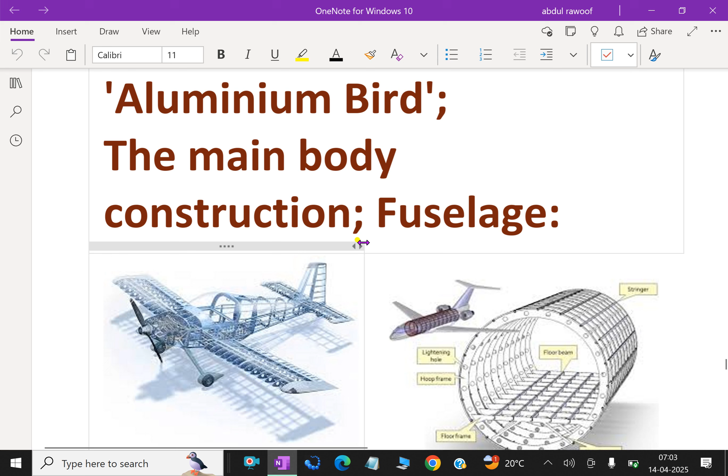Both aircraft and spacecraft must balance structural strength and lightness, typically utilizing monocoque or semi-monocoque structure. The core design principle for all flight vehicles is to minimize weight while maintaining adequate strength to support payload capacity, fuel efficiency, durability, and overall performance.

Engineers must carefully select lightweight materials and optimize structural framework to withstand the stress of flight, whether in Earth's atmosphere or space. Flight vehicles are constructed from multiple components, component assembly and sub-assemblies, each serving a specific function but requiring seamless integration to form a fully operated system.

Achieving this integration is a complex challenge requiring engineers to consider structural integrity, aerodynamics, propulsion system, avionics, and safety features in a cohesive design. This demands multidisciplinary expertise and extensive experience, as even minor influences in design integration can impact performance, reliability, and maintainability. Whether for airplanes or spacecraft, effective component integration is essential to ensuring safe and efficient operation.

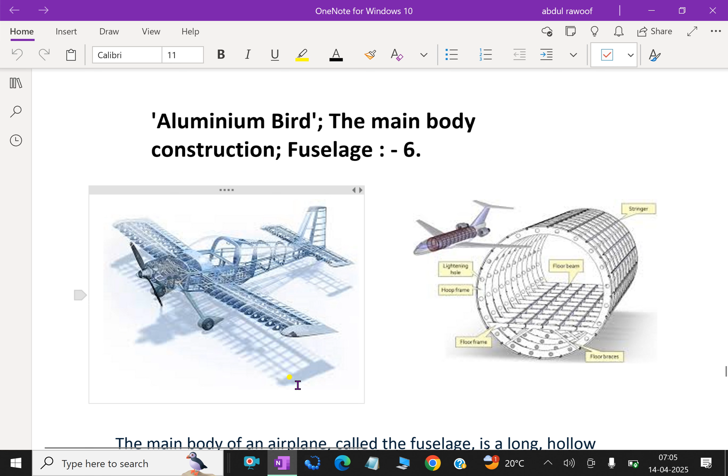Now let us discuss further about the main body construction of the flight, that is fuselage. The main body of an aeroplane, called fuselage, is a long hollow structure that supports the wings, tail assembly, and other components. It is designed to provide space for the crew, passengers, and cargo, and to be aerodynamically efficient.

Fuselage constructions can be either truss type, monocoque, or semi-monocoque design. Fuselage construction, truss type: this older design uses a framework of beams and struts, often made of wood or steel, with a covering of fabric or metal.

Monocoque, semi-monocoque: modern aircraft typically use this construction, where the skin of the fuselage is an integral part of the structure, distributing loads across the entire surface.

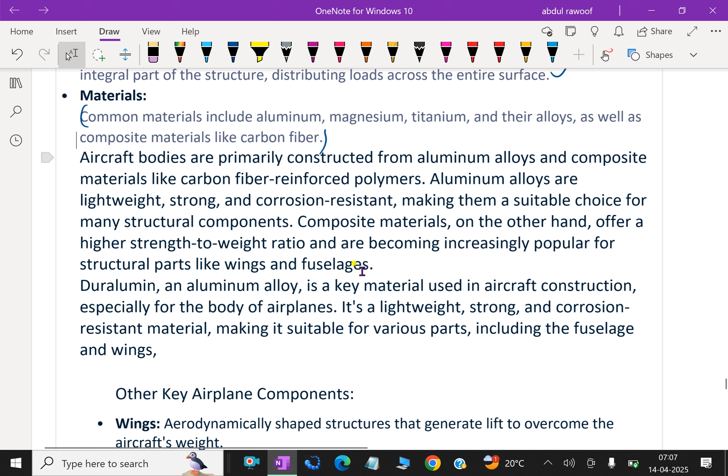Common materials include aluminium, magnesium, titanium and their alloys, as well as composite materials like carbon fiber. Aircraft bodies are primarily constructed from aluminium alloys and composite materials like carbon fiber reinforced polymers. Aluminium alloys are lightweight, strong and corrosion resistant, making them a suitable choice for many structural components. Composite materials, on the other hand, offer a higher strength to weight ratio and are becoming increasingly popular for structural parts like wings and fuselage.

Duralumin, an aluminium alloy, is a key material used in aircraft construction, especially for the body of aeroplane. It is lightweight, strong and corrosion resistant, making it suitable for various parts including the fuselage and wings.

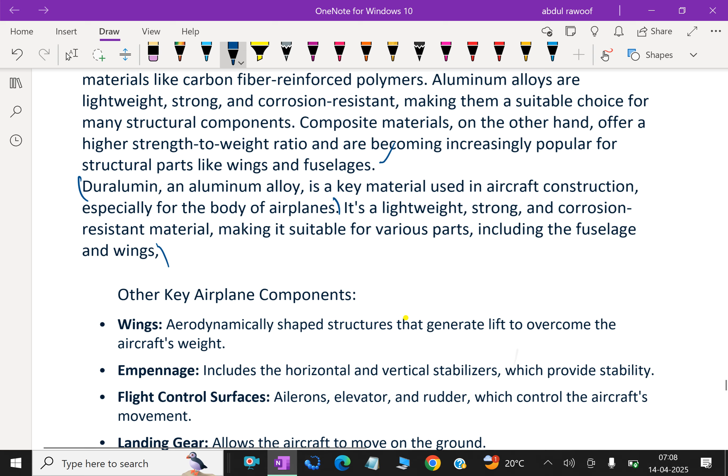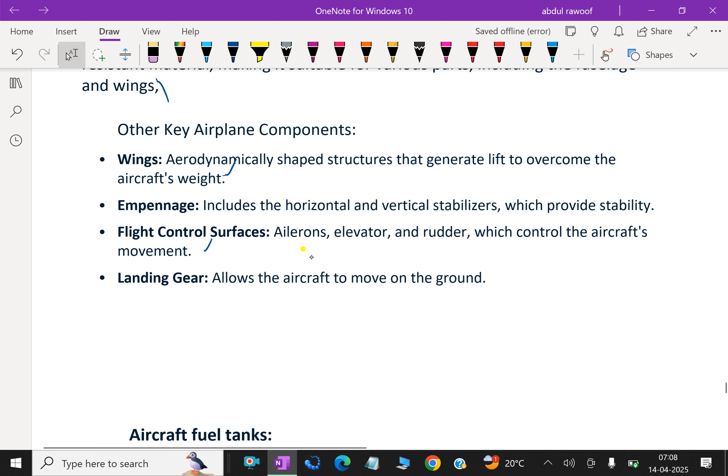Wing: aerodynamically shaped structure that generates lift to overcome the aircraft weight. Empennage includes the horizontal and vertical stabilizers which provide stability, and flight control surfaces - ailerons, elevators and rudder - which control the aircraft movement. Landing gear allows the aircraft to move on the ground.

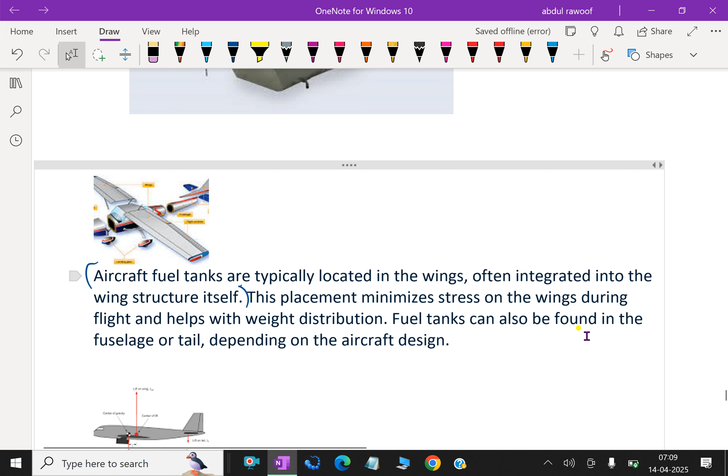This is a typical fuel tank for the aeroplane. Aircraft fuel tanks are typically located in the wing, often integrated into the wing structure itself. This placement minimizes stress on the wings during flight and helps with weight distribution. Fuel tanks can also be found in the fuselage or tail depending on the aircraft design.

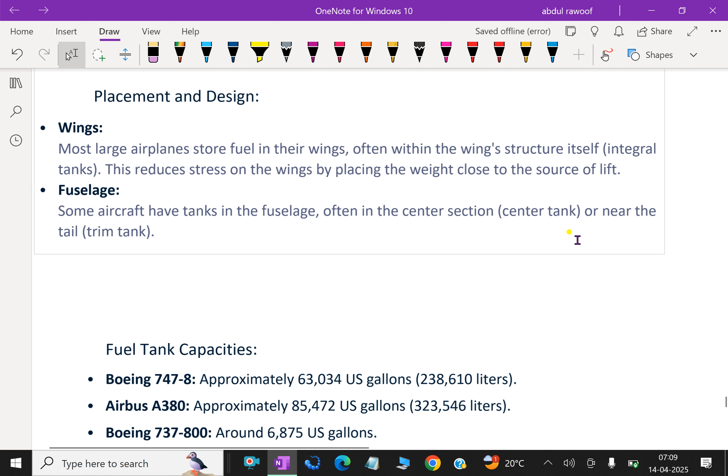Wings: most large airplanes store fuel in their wings, often within the wing structure itself as integral tanks. This reduces stress on the wings by placing the weight close to the source of lift. Fuselage: some aircraft have tanks in the fuselage, often a center tank, or near the tail as a trim tank.

Fuel tank capacity: for example, Boeing 747-8, approximately 63,034 US gallons, near about 238,610 liters. Airbus A380, approximately 85,472 US gallons, equivalent to 323,546 liters. Boeing 737-800, around 6,875 US gallons.

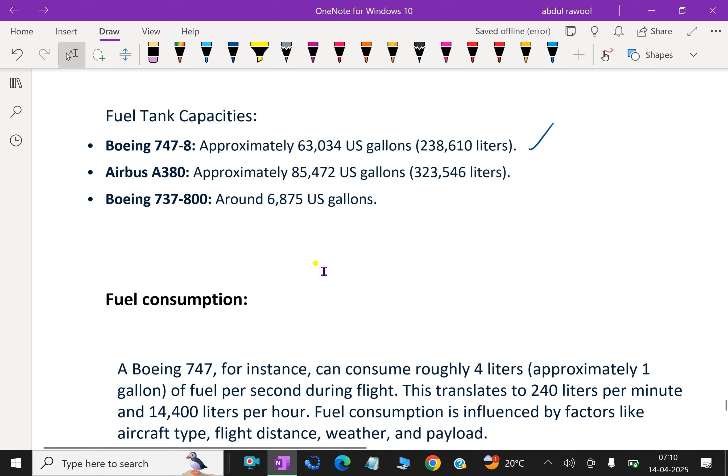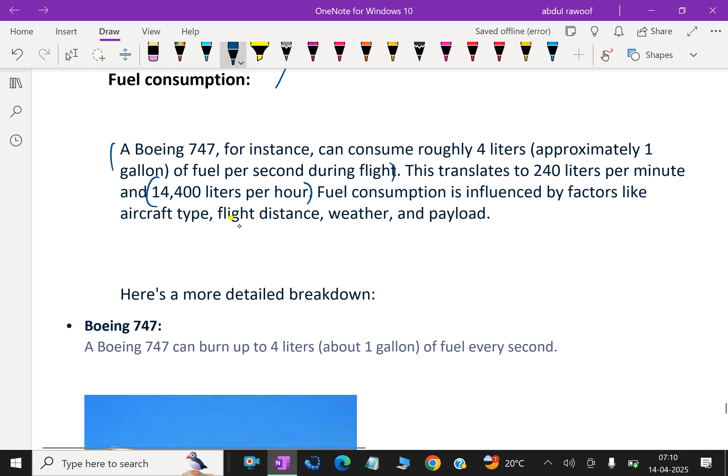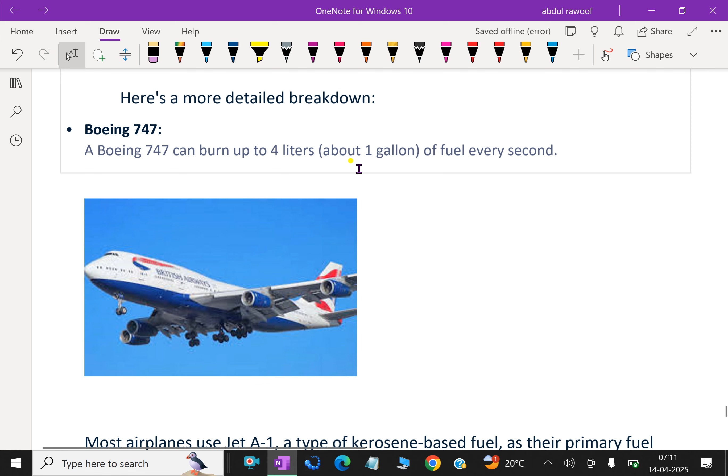Fuel consumption: a Boeing 747, for instance, can consume roughly 4 liters, approximately 1 gallon, of fuel per second. This is very high fuel consumption - 4 liters per second. This translates to near about 240 liters per minute and 14,400 liters per hour. Fuel consumption is influenced by factors like aircraft type, flight distance, weather, and payload.

Most airplanes use Jet A1, a type of kerosene-based fuel, as their primary fuel source. This fuel is widely used in turbine engine aircraft, including commercial jets and military aircraft. Another type of jet fuel, Jet A, is also used, particularly in the United States, and both are interchangeable. A third type, Jet B, is a wide cut kerosene or gasoline blend, less commonly used except in very cold climates. White petrol, known as aviation gasoline or avgas, is a highly refined petroleum product - it is a fraction of kerosene, meaning it is distilled from crude oil.

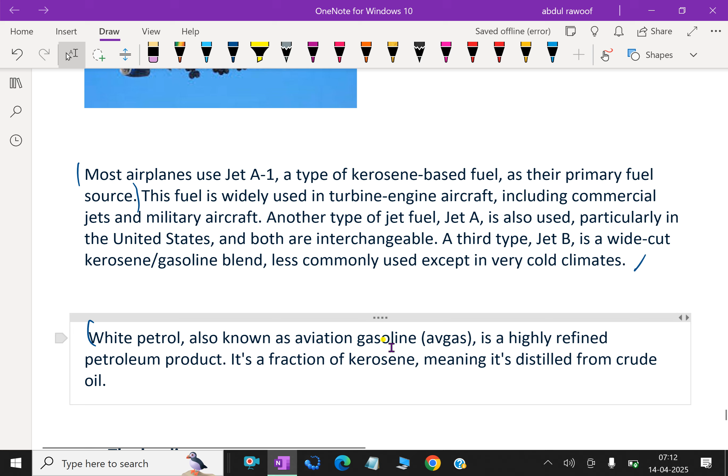Landing gear: the landing gear of an aircraft is the system of wheels, struts, and other components that allows an aircraft to safely land, taxi, and take off. It's essentially the undercarriage of the plane. This system includes the main landing gear, usually located under the wings or fuselage, and the nose gear or tail gear in some designs.

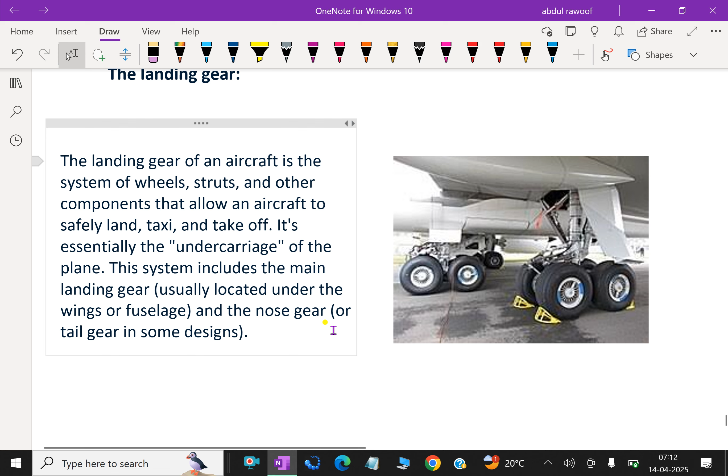So far we discussed about the body construction of an aeroplane. In further details, we'll continue in next videos.